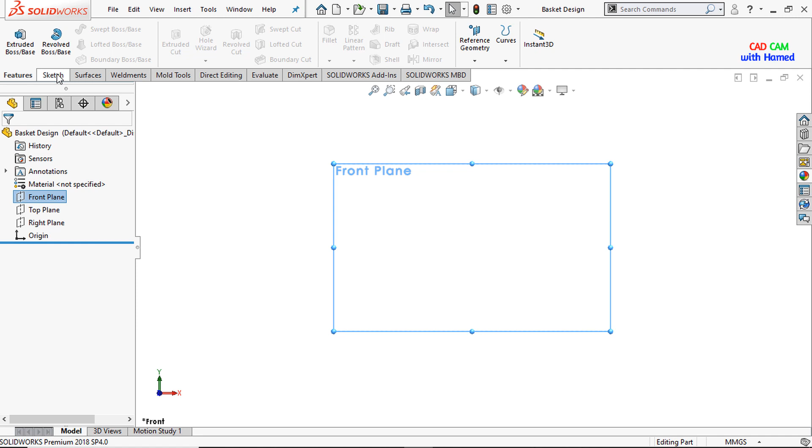So let's start. First, from here I will select the front plane and make it normal. From sketch I will select the line and draw a line here like this one.

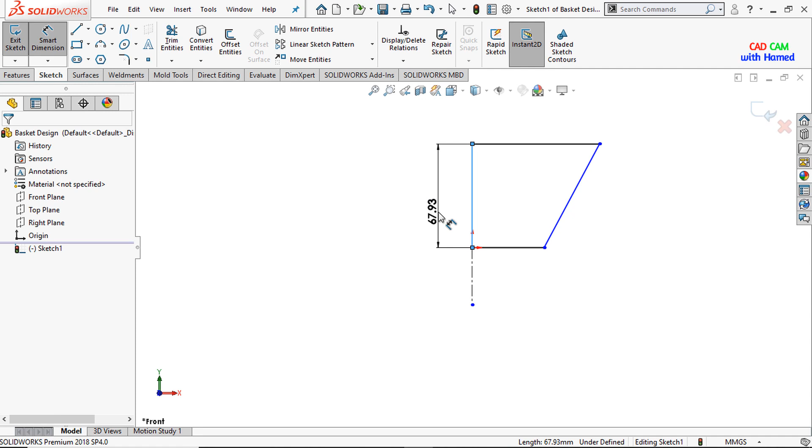Now I will just select the center line from here like this one, and now I will give dimensions to these lines as this one is 200, this one is 100, and this dimension is 130 mm.

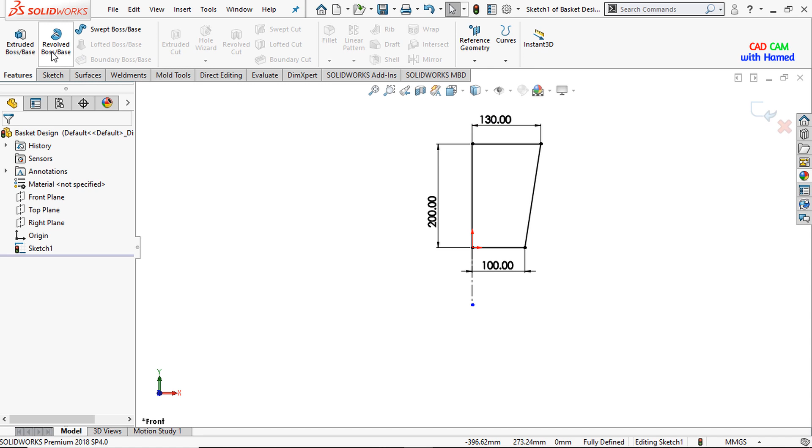Press OK. Now sketch is fully defined. Press OK from here. From features I will select the revolve boss or base command and I will select this center line as the axis of revolution.

Press OK from here. Now again I will make the front plane normal and sketch the front plane here, and here I will draw a circle.

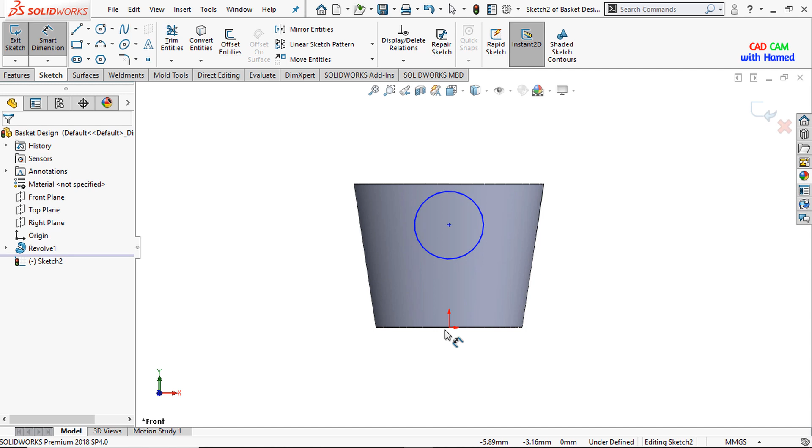Like this one, and will give dimensions to this as from this point to this dimension is 150 and the circle dia is 100.

Then just press OK from here and just press this center point and this origin and make it vertical relation.

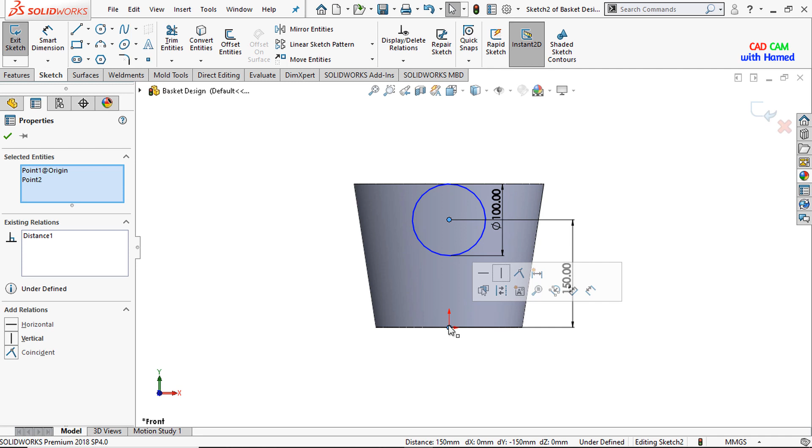Now sketch is fully defined, and from here I will select the corner rectangle and draw a corner rectangle here like this one. From smart dimensions I will dimension this, as this one is 165.

Then just press OK from here and OK. From features I will select the trim entities and will trim the part that is not required to me.

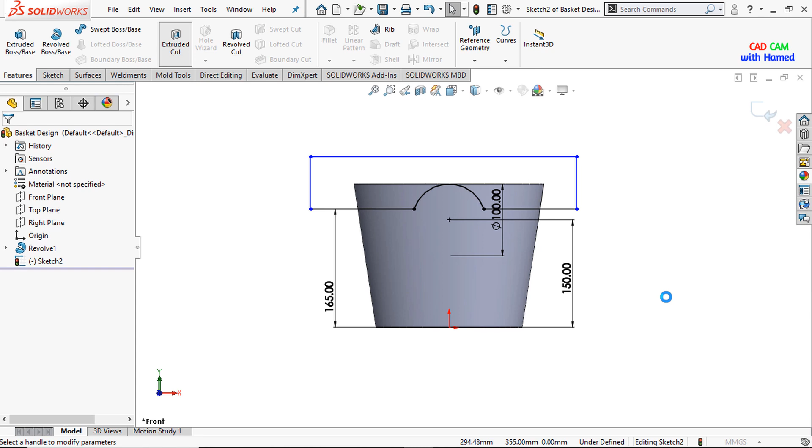Press OK from here. From features I will select the extrude cut and here I will select through all both side. Now it will cut through all both side.

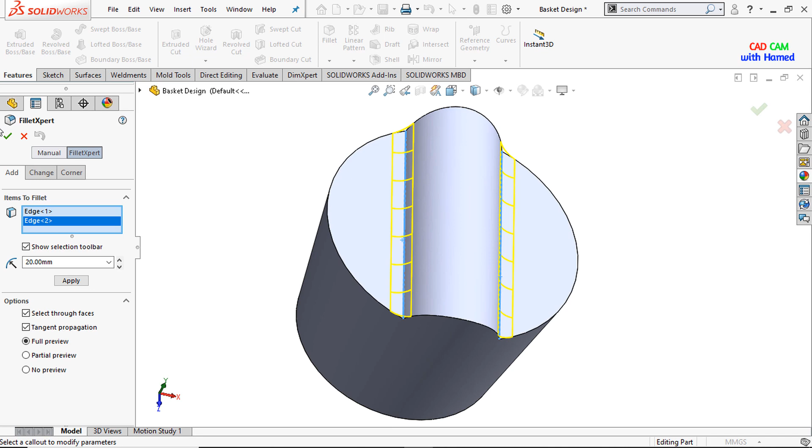Press OK from here. Now here I will give the radius of 20 mm on both sides, and press OK from here, and again I will select the fillet and will give radius here of 10 mm.

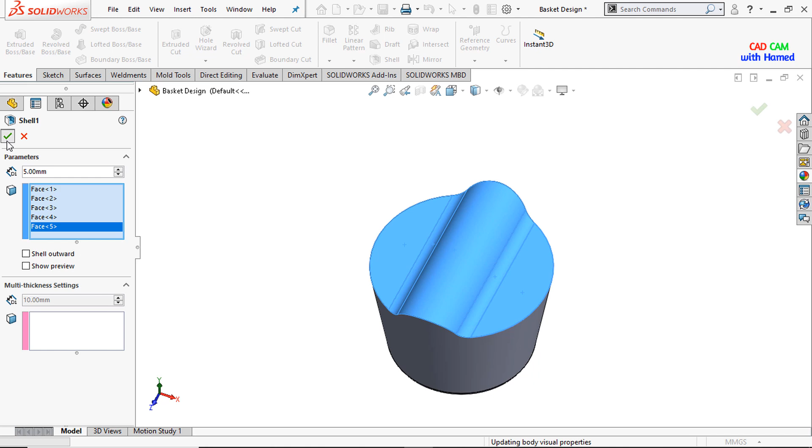Press OK from here. Now I will use the shell command here in order to obtain my required geometry, and then give this thickness of this wall that will remain as 5. Press OK, like this one.

Now I will again make the front plane normal, and from here I will select the hidden lines, and now I will select the front plane and sketch here.

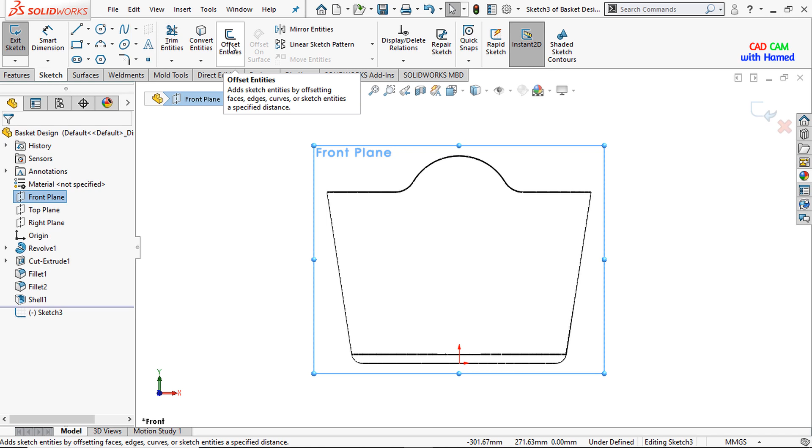From sketch I will select the offset entities and will offset this one in the reverse direction of 10 mm. Press OK, and from here I will select the line command.

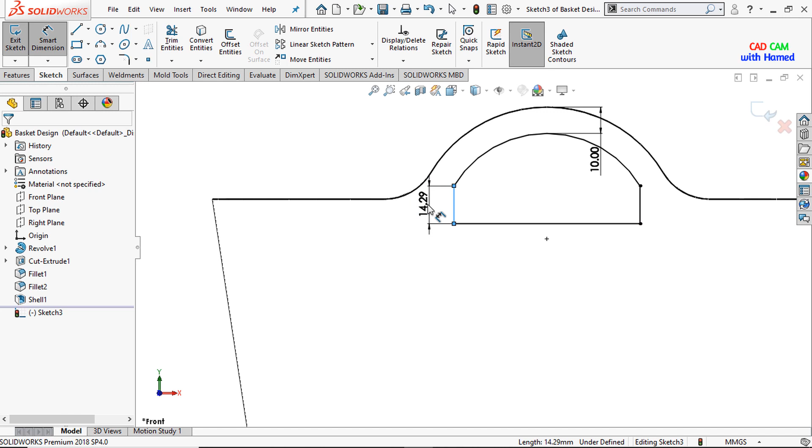And will give dimension to this as 10 mm. Sorry, this dimension is 12 mm, and press OK from here.

Now sketch is fully defined, and from features I will again select the extrude cut and will select through all both sides and press OK. Now it has been extrude cut on both sides.

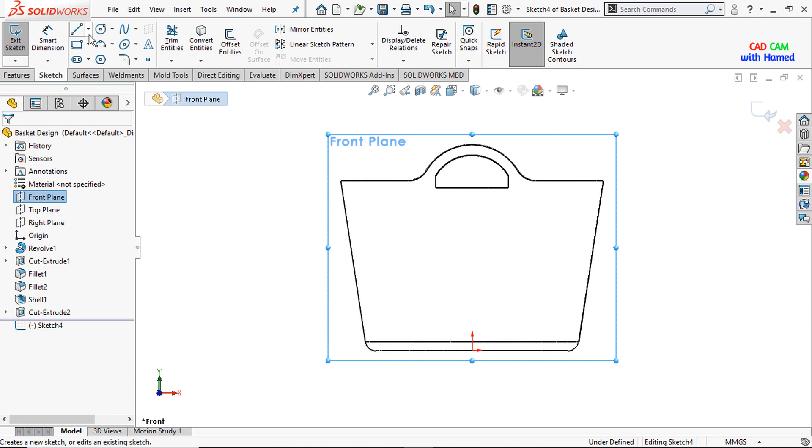Again I will select the front plane, make it normal and sketch the front plane again, and here I will draw a center line like this one, and dimension to this one is 80 mm.

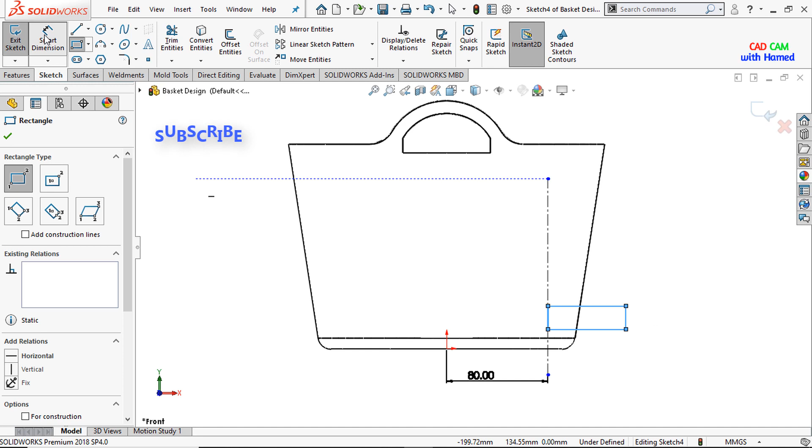Press OK. Now I will just select the corner rectangle here like this one and will give dimensions to this as from this to this is 2 mm, and the width is 10 mm and the length is 50 mm, and then just press OK from here.

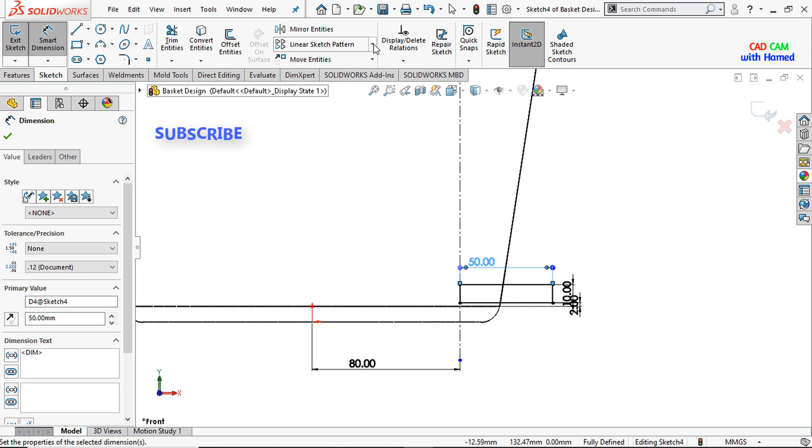And from sketch pattern I will select the linear sketch pattern, and here I will choose one because I don't require sketch in the X direction, I only require sketch in the Y direction. And here I will give the distance of 13 mm and just drop down it.

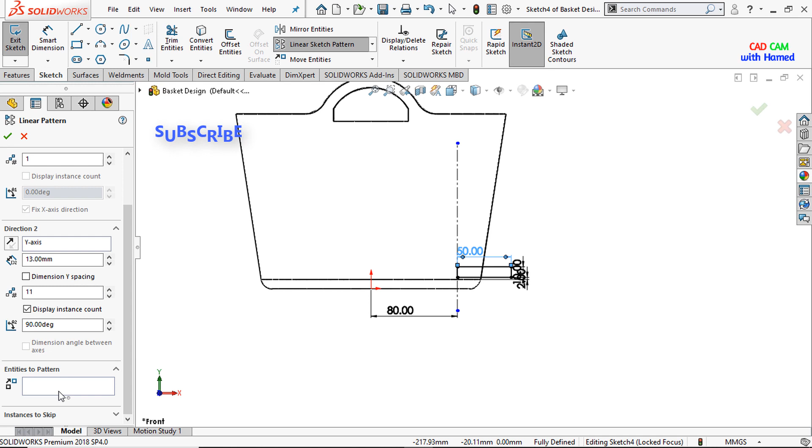Entities to pattern, here I will choose this rectangle like this one, and from here press OK.

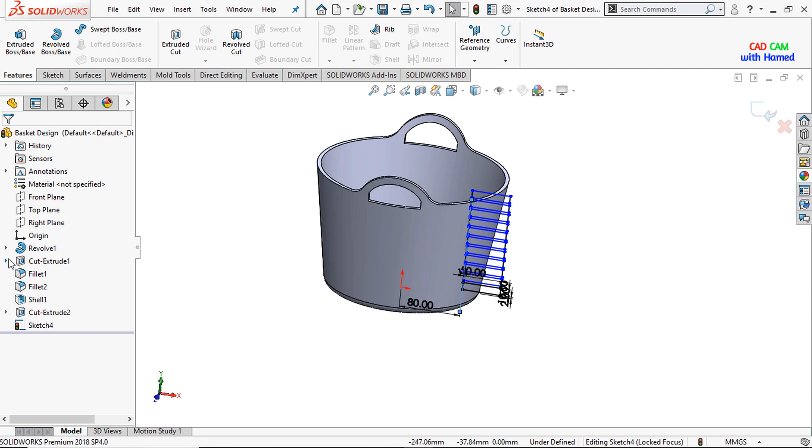Now just make it solid part, and from features I will select the Revolved Cut, and before this I will show this part here because I require the axis of revolution here, so I will select this center line.

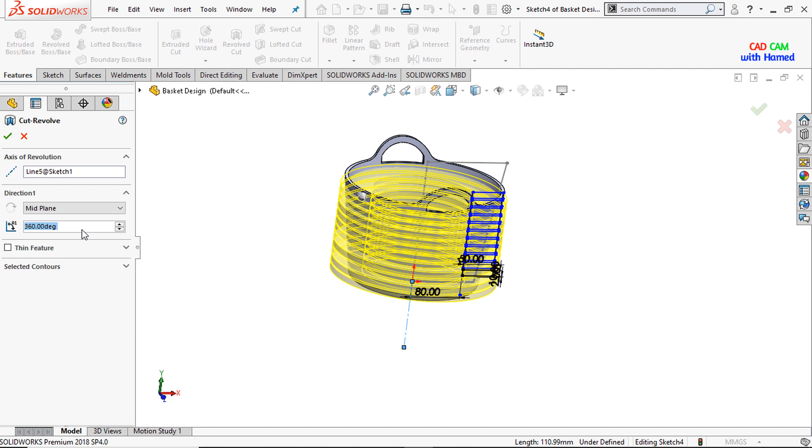Clear this selection, and axis of revolution here is this center line that is from origin, and here I will select the mid plane, and degree here is 6 degree. Then just press OK from here.

Now it has been made, and from here I will select the circular pattern, and for direction I will select this center line, and here the number of patterns are 36 and 360 degree. I selected, press OK from here.

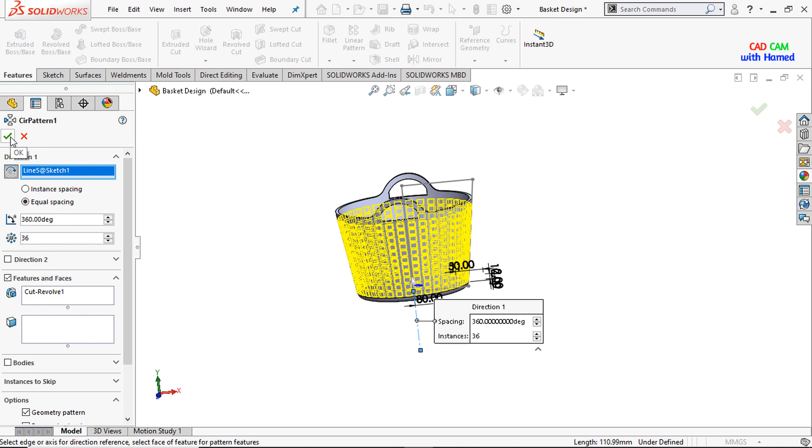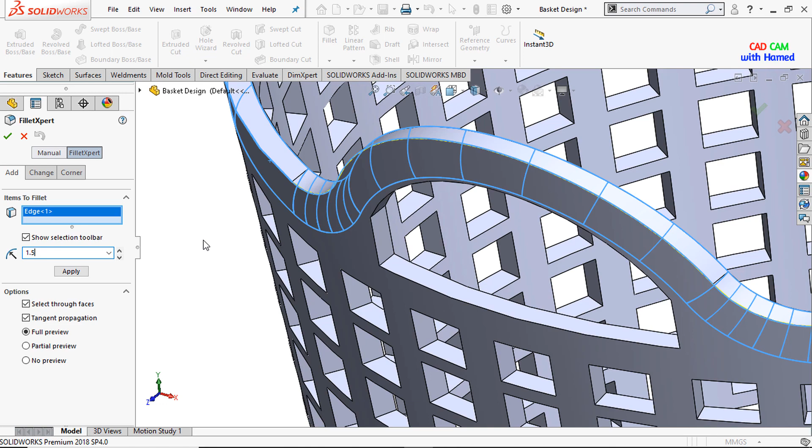Now I will just hide this one, and here I will give fillet, like these are of 1.5, this side and this side totally.

Then just press OK from here, and again use fillet, and here I will remove these sharp corners and will give this dimension as 5 mm.

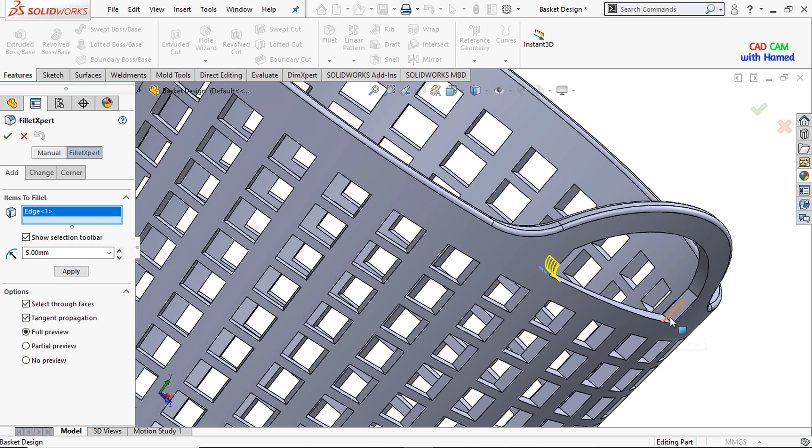We'll choose this one, and from here the same process. Then just press OK from here.

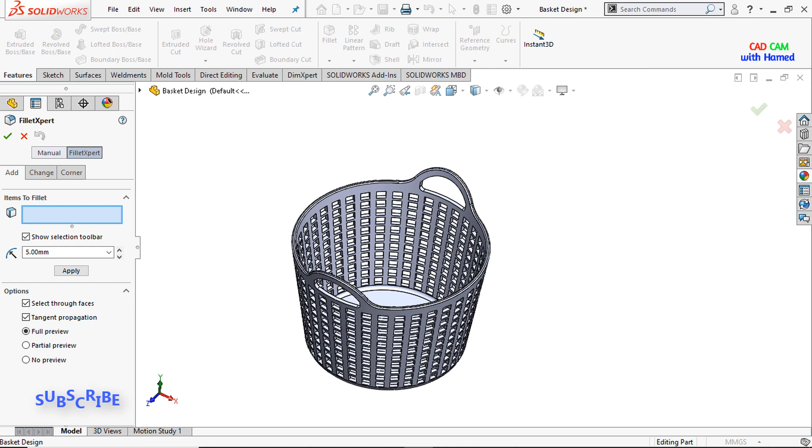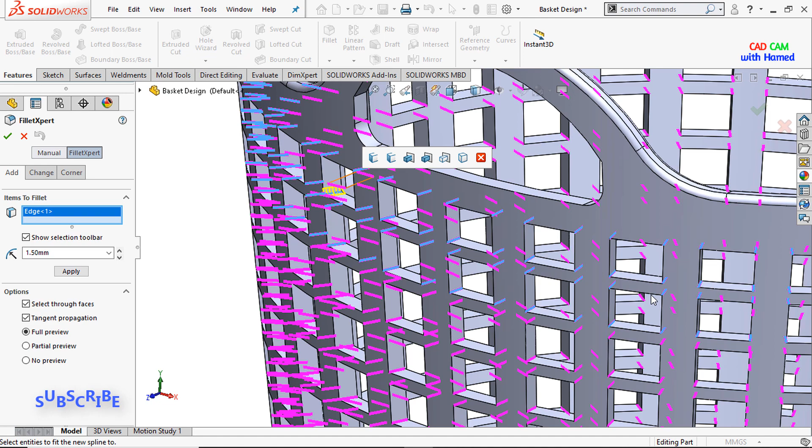Now I will again use fillet command, and from here I will give this dimension as 1.5, and from here I will select this one, and when I select this one, this comes, and I will select the third one because I require fillet on all the sharp edges here, and it will automatically select all the sharp edges from here. All the sharp edges are selected, and then just press OK from here.

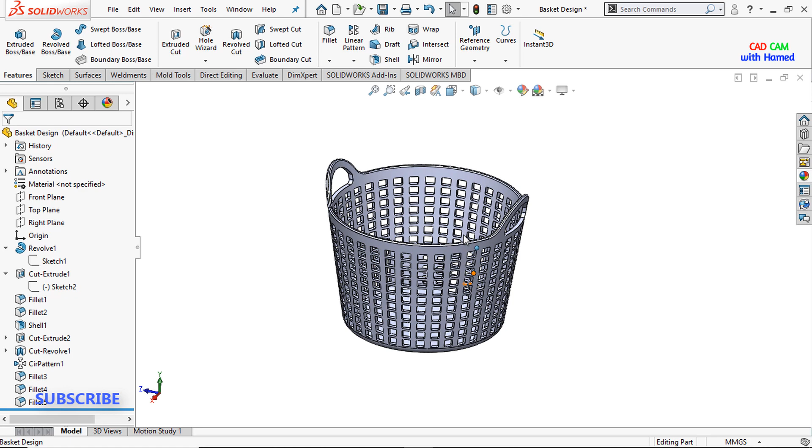Now all the sharp edges have been removed from here, as you can see. And here I will just give appearance to our basket, that I will select the green color from here, and then just press OK from here.